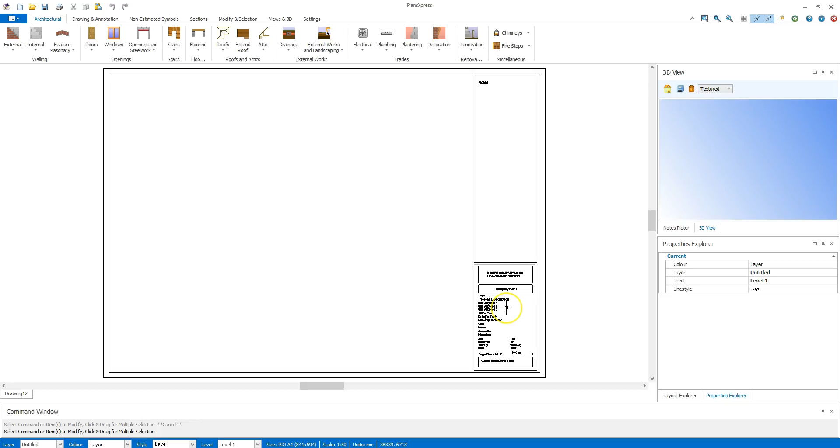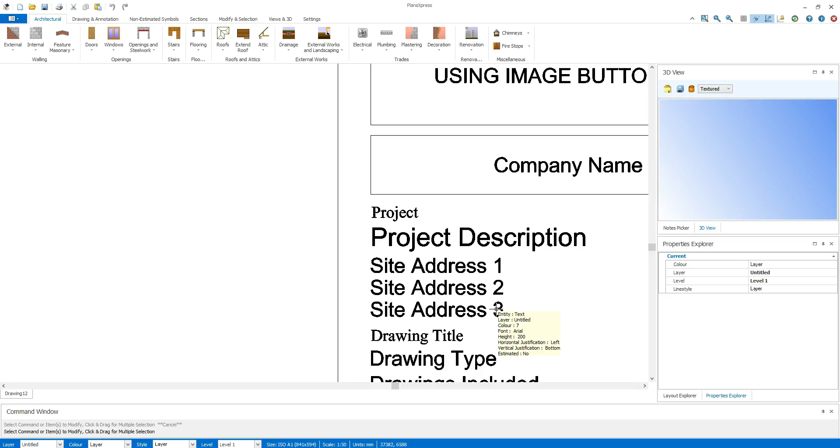To see this in action, move your mouse or cursor onto the drawing title block at the right of the screen. Scroll the wheel in and out, and you will see the software zoom in and out, around the original cursor position. Zoom out, move the cursor position and zoom in again, and you will then see that PlansXpress is zoomed in on that new position.

We're now going to look at moving the drawing sheet around the screen. Hold the middle scroll wheel down and keep it pressed down. Notice a hand icon has appeared on screen. Keeping the middle mouse pressed down, move the sheet around to place the title block in the middle of the screen. Zoom in and out if you wish.

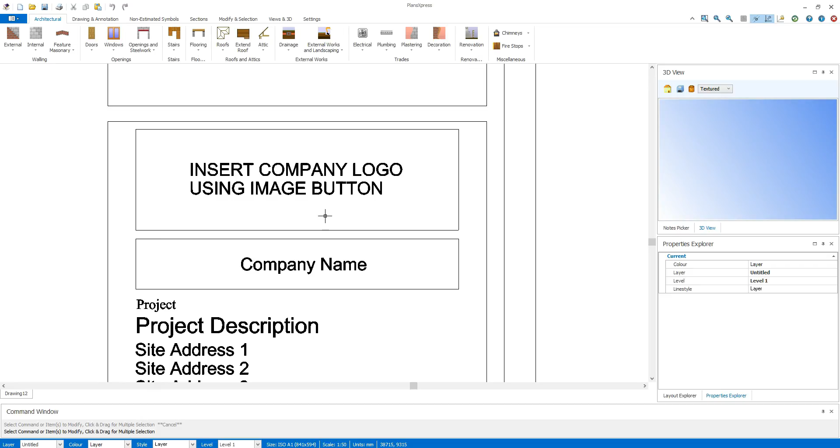This process of scrolling and dragging the page around is an important one to master. Spend a few seconds practicing doing this so that you can easily move the page around, locate and zoom in on points of interest on the drawing.

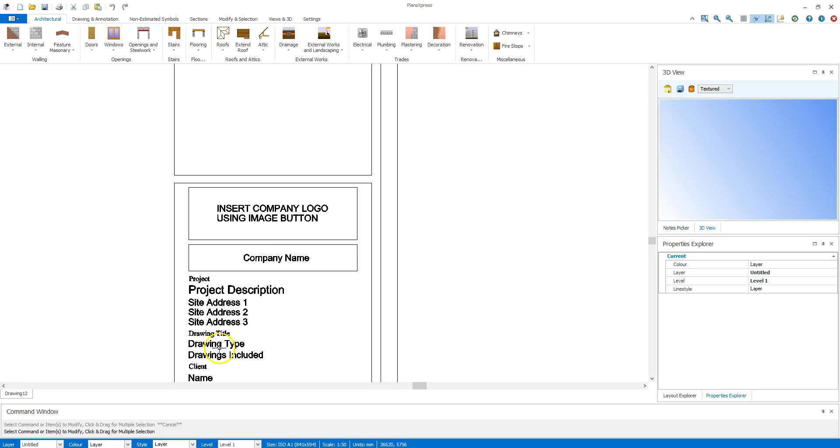Next, let's take a look at construction lines. These work in exactly the same way as drawing a faint pencil line on the drawing to help set things out. These are located on the Drawing and Annotation ribbon.

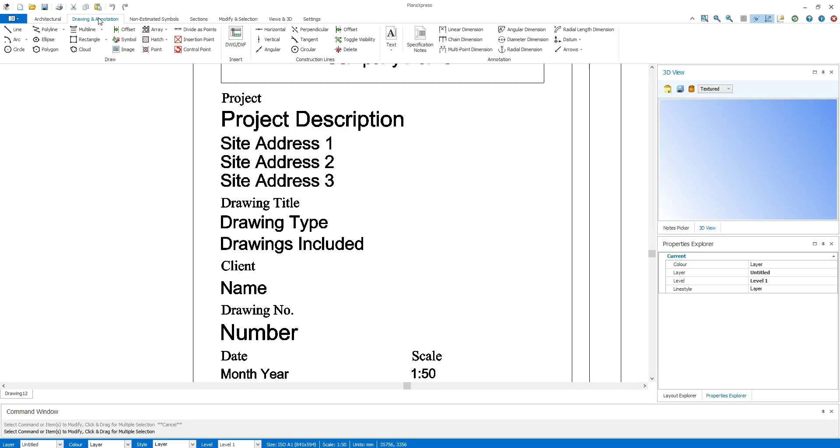First, click on the horizontal construction line and place towards the top of the page. You may need to zoom out before you do this. Next, click the left-hand mouse button to place the line.

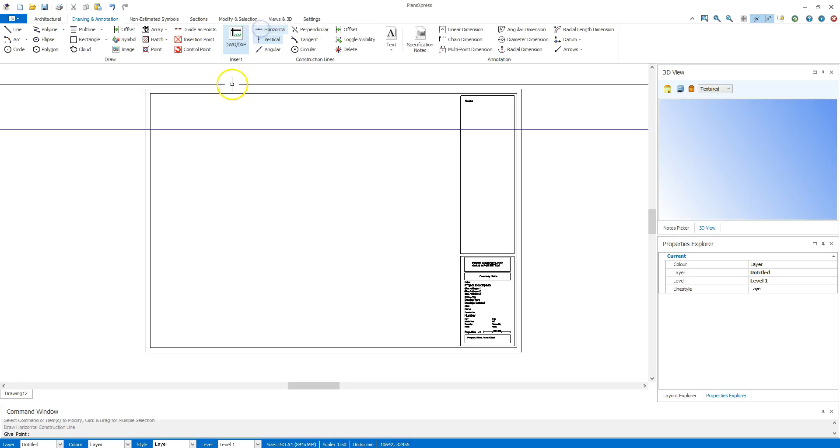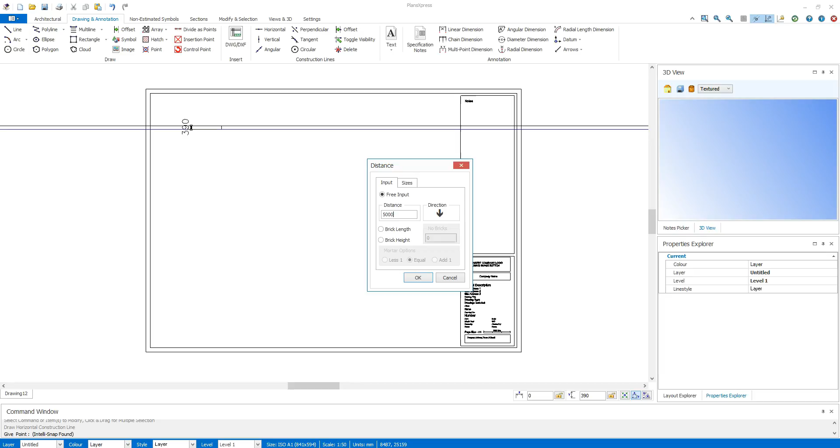We are now going to set out another line relative to the first horizontal line. Select another line. Hold your mouse over the construction line. Do not click, but instead press R on your keyboard. This tells the software that you want to set out something relative to another point, rather than snapping onto it. Next, press the down arrow on your keyboard and enter 5000. Hit OK, and another horizontal construction line appears 5000 millimeters away from the first line.

Let's now repeat this process for a vertical construction line. Select a vertical construction line from the menu and place on the left-hand side of the drawing. Click OK with the left-hand mouse.

Once again, hold the mouse over the intersection of the two lines or anywhere on the vertical construction line. Press R on your keyboard. Again, this is because you wish to set out a line relative to the first line, R standing for relative. This time, hit the right-hand arrow on your keyboard and enter 6000. Hit OK, and another line appears, this time 6000 millimeters away from the first. You can use the construction lines to set out anything on a drawing, such as the overall footprint of a house.

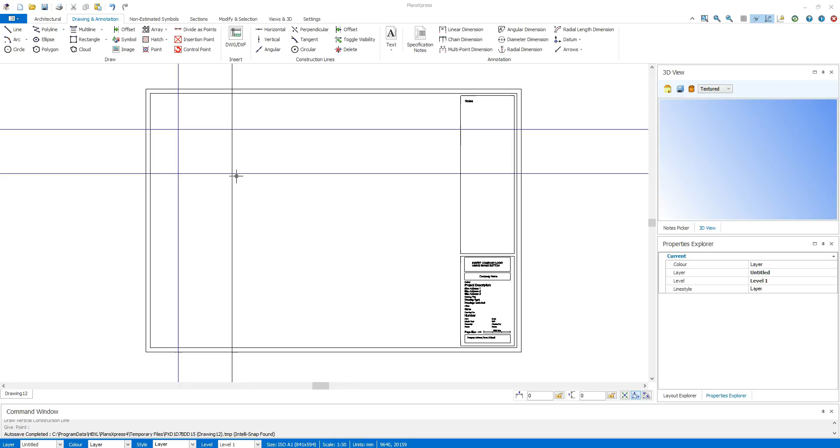Let's now have a look at the escape key. Some commands, such as construction lines, doors and windows, will continually be available to draw unless we press the escape key on the keyboard. This key usually appears on the top left-hand side of your keyboard and is marked ESC. To stop the current command, press Escape, and the software is then available to select objects rather than to draw another construction line, door or window, etc.

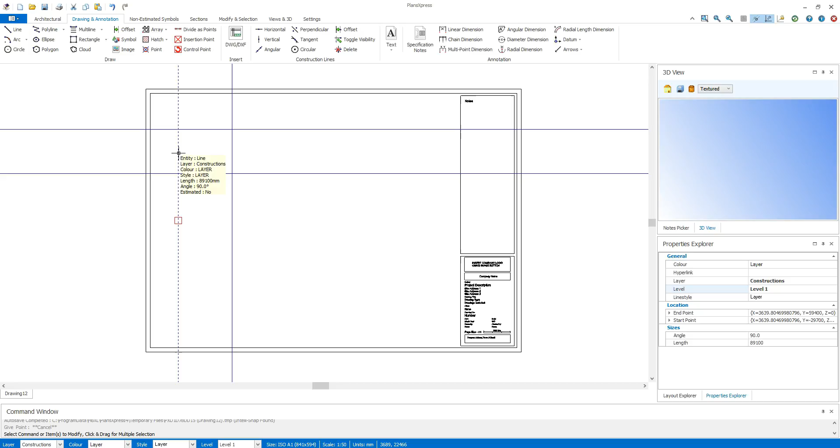You'll notice now that because I have pressed Escape, I can now select, for example, the construction lines. You can also drop the current command by selecting another object, such as a manhole, a roof, or a wall, etc. Let's now have a look at the undo and redo commands.

If you ever make a mistake using the software, or you want to undo something you have done, locate the undo command at the top left of the screen and press undo. This will remove that mistake. Conversely, if you press the redo button, this will cause the mistake to reappear.

Try pressing undo a couple of times and you will see the construction lines disappear. Repeat undo 2 more times and all the lines will be removed. Now click on the redo button 4 times and all the lines will reappear.

Remember, you can always use the undo command whenever you make a mistake or when you get stuck while using the software. You can use the undo and redo command to undo anything, such as undo a delete. You can also use the standard Windows commands Ctrl-Z to undo or Ctrl-Y to redo.

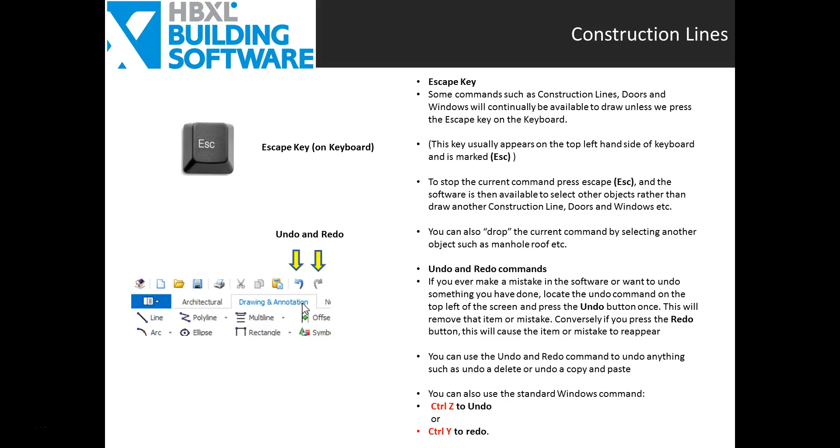We will now have a look at selecting items from the architectural ribbon or toolbar. Click on the architectural ribbon.

Look closely at the buttons. Underneath each button is a small down arrow which gives you access to the underlying selections. On the left-hand button, click on the down arrow.

Notice that the button currently displays a symbol denoting brick and block work. Select the stone cavity block wall.

Choose a particular wall height, say a single story. Left click with your mouse.

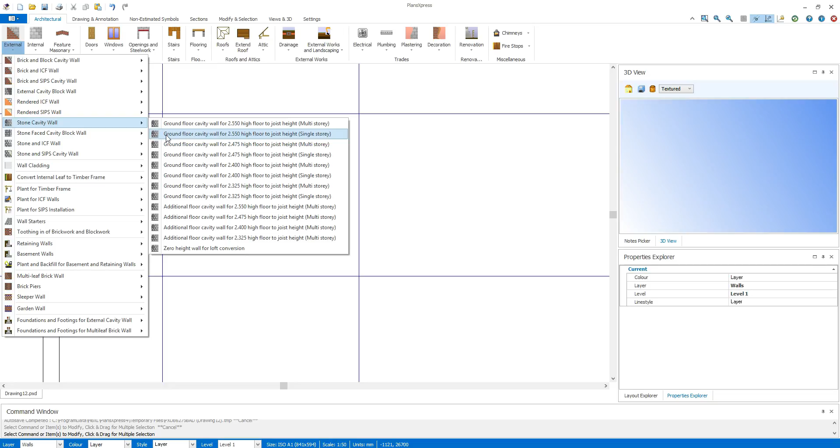Once the resulting dialog box has loaded, you will notice that the button has changed its appearance to show the stone cavity block wall. This means that in the future, if you now click on the button, it will allow you to draw a stone cavity block wall.

You do not have to drill down into the menu in the future to select that wall type. Simply click on the button. The button has, in effect, remembered the specification of the last wall you drew.

Next, work through the resulting dialog and note that the software is asking for details that define the dimensions and specification for the walls. Note that the cells entered in yellow will affect the appearance of the drawing, for example the wall height. Values entered into the white cells are being collected for estimating purposes when used in conjunction with EstimatorXpress and do not affect the appearance of the drawing.

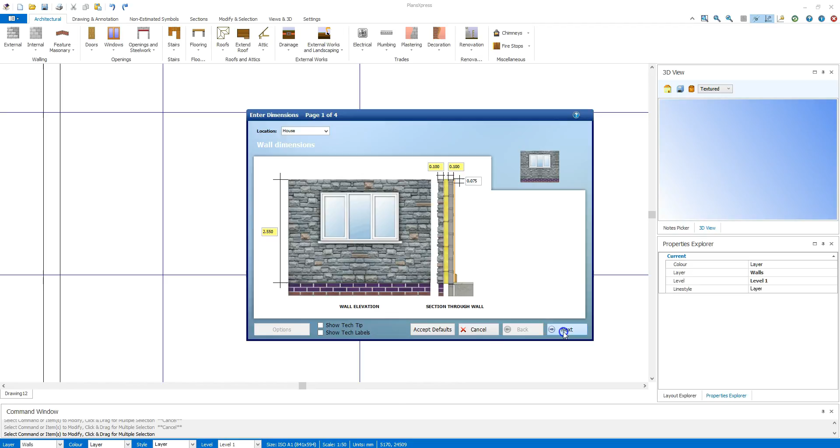Click Finish when you have reviewed all the dialogues.

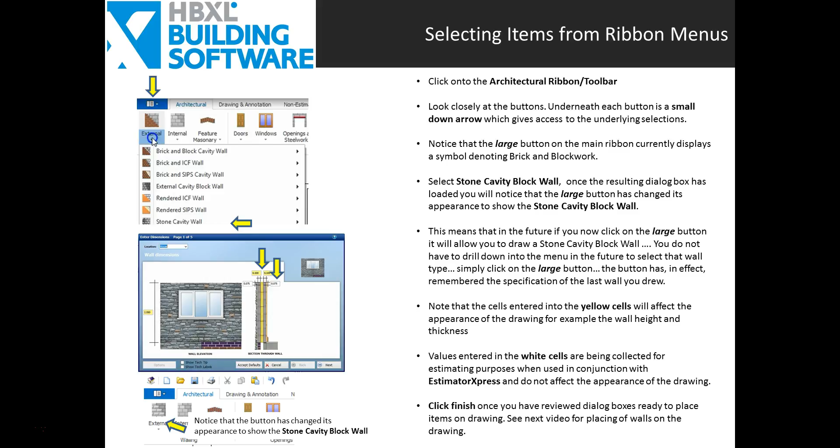You can now enter the wall onto the drawing. Place your mouse over the first intersection point and left click. Raise your finger off the mouse, place it on the second point and left click again. Repeat the process for the third and fourth intersection.

After the fourth click, press C on your keyboard to close the loop. The C command can always be used to close any item, and it will always close the loop via the shortest direction.

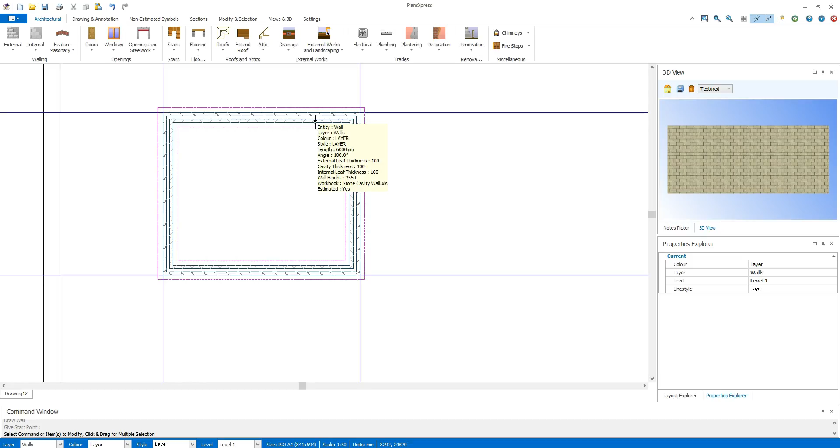Now use the undo command to remove all the walls. Next, add the walls back by selecting the stone cavity wall button and adding back 2 walls to the left and bottom of the rectangle.

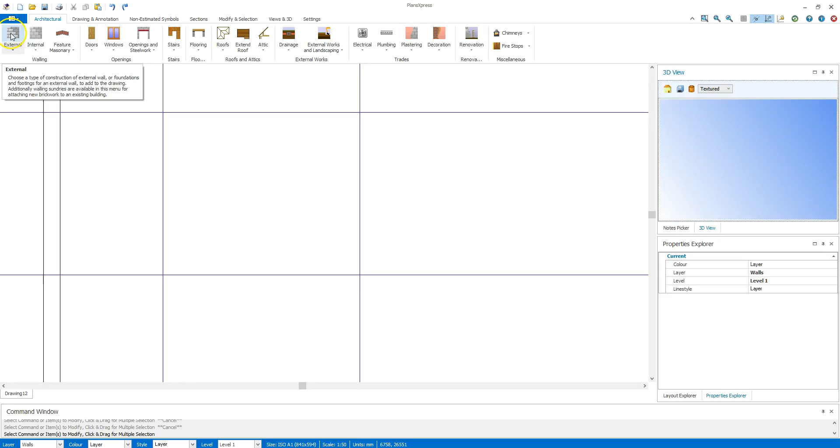Now press S on the keyboard, and this again closes the loop, but does so by keeping the walls at right angles, i.e. it does not take the shortest distance between the start and the current position and maintains a rectangular shaped building. The S key only works for walls.

Let's now have a look at justification. First click on a wall that you have just drawn. You will see that the wall appears dotted, indicating that the wall has been selected.

If you look at the top left-hand side of the screen, you will notice that the wall is justified to the right or left of the line, depending on how you drew the wall and the justification mode that the system was last used in.

If you select Justify Center, the wall is justified to the center of the line. If you do it to the left, it is justified to the left.

Bear in mind that you will not always have a construction line there, and the wall may be changing its position relative to an imaginary line. Let's place that back in right-hand justification.

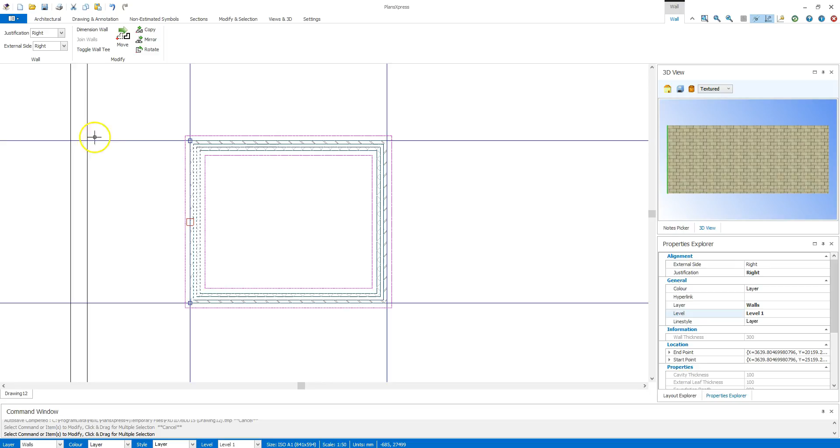If I select all the walls by clicking to the top left-hand corner, holding my mouse down and dragging over, you will then see that all the walls have been selected. I can then click on those to justify those to the left. You will now see that all of those have been justified to the left of the lines.

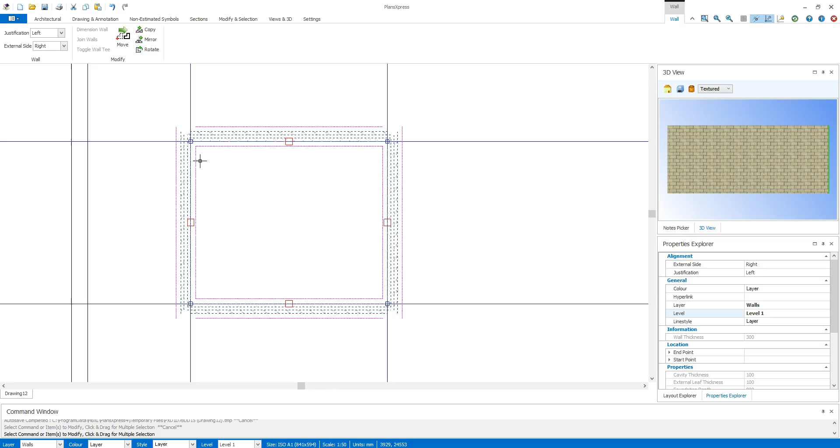The justification of the wall can often be confusing, as it depends on the way that the wall has actually been drawn. The important thing is to check that visually it appears okay and switch the justification if required.

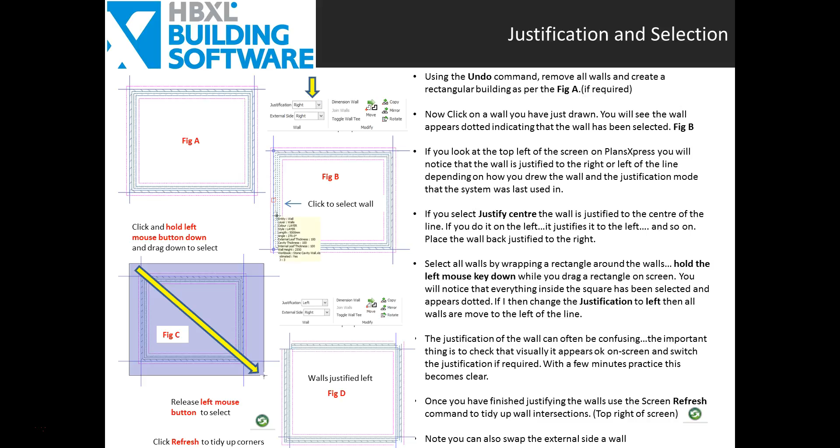Let's start by showing you the basic commands of how to draw walls. Click on the architectural ribbon, choose the external walls, brick and block cavity wall. On this occasion I'm going to pick a 2.4 high single story wall.

A dialog pops up. For those of you who already have EstimatorXpress, you'll recognize these. For the time being, I'm just going to accept the defaults.

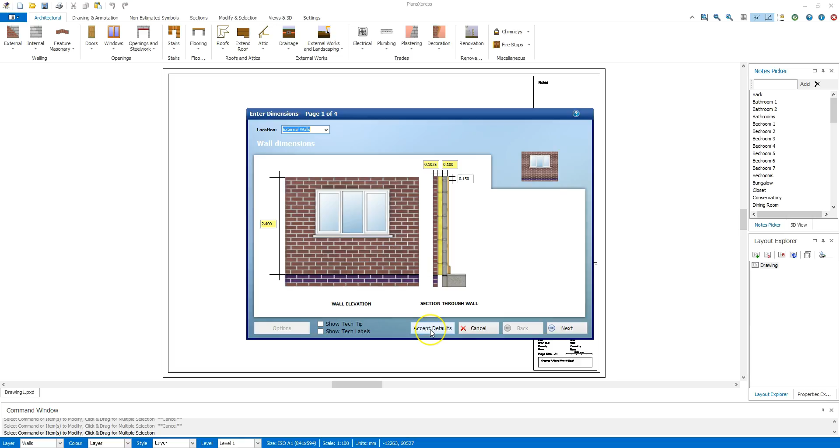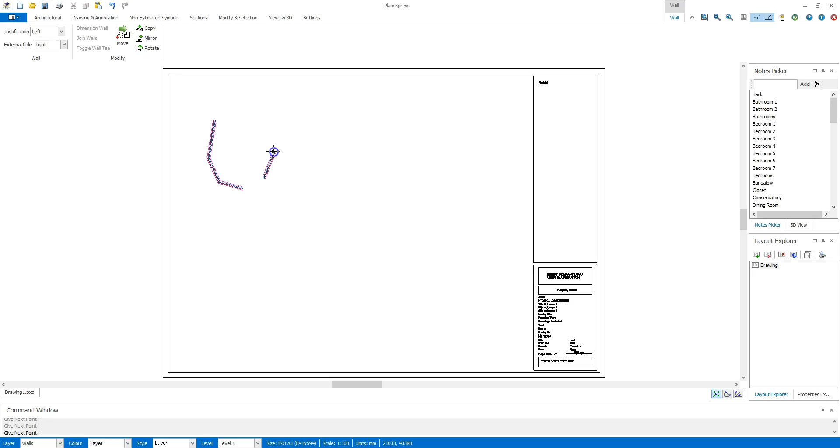I can then place the walls anywhere on the drawing. I click with my left mouse, take my finger off the mouse, move to a next position, and repeat the process, clicking, lifting my finger off as I go around. When I finish drawing my walls, I press Escape.

Now I've got my walls. I'm going to zoom in on those by placing my mouse in the middle of that particular group of walls and scrolling my mouse wheel out. Reversing the process goes the other way.

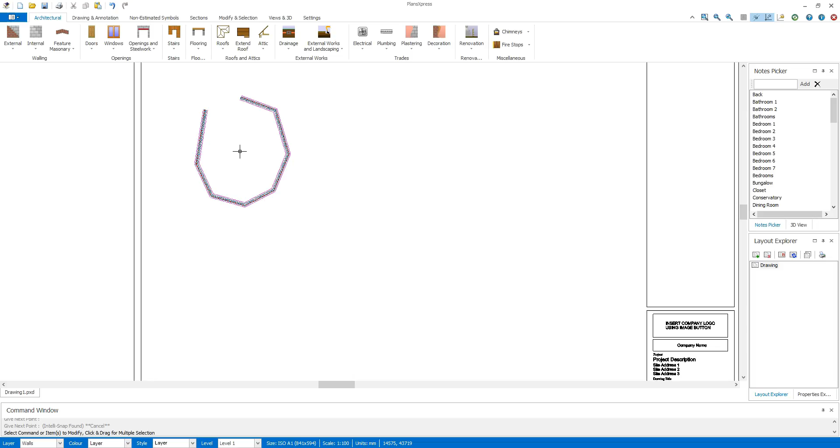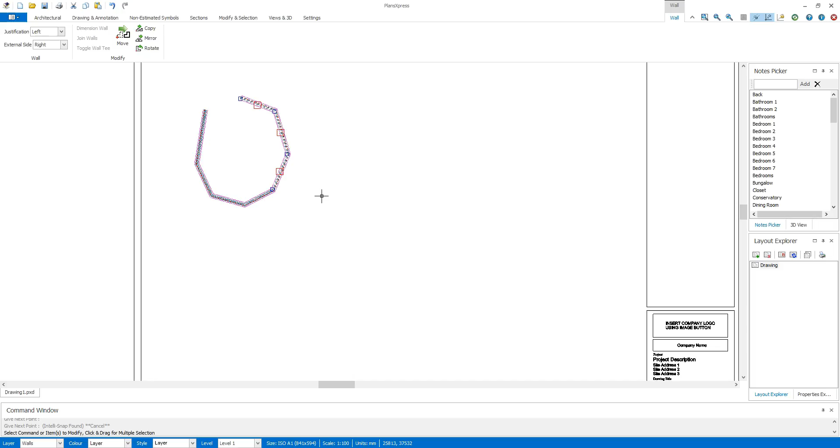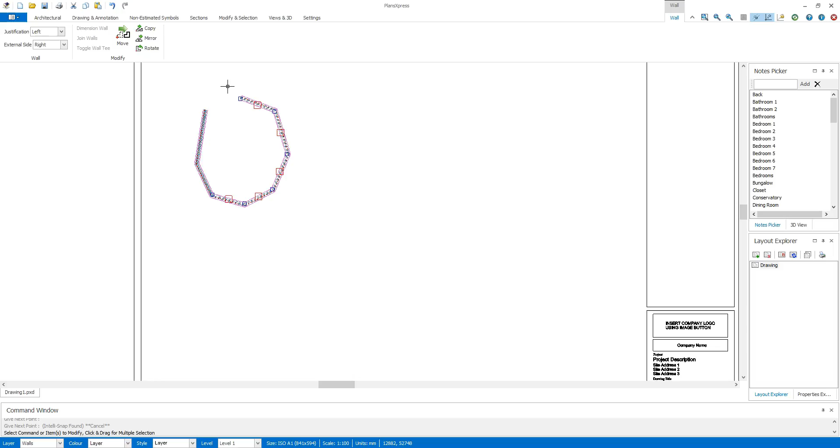I can select each individual wall by clicking on it, or I can draw from top left to bottom right to select a group of walls. You'll notice that only the walls I've embraced with the rectangle have been selected. Alternatively, if I go from bottom right to top left, you'll now notice that all the walls that touch the rectangle have been selected, as opposed to all the walls that were completely embraced by the rectangle. Once I've selected a group of objects, I can now copy them, rotate them, or in this case, delete them.

Let's see that again. Select the walls, click, the walls appear selected, and you can then delete them using your keyboard.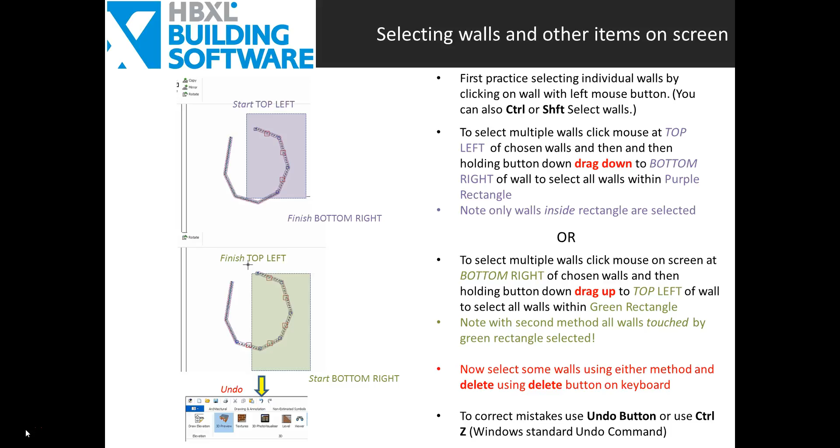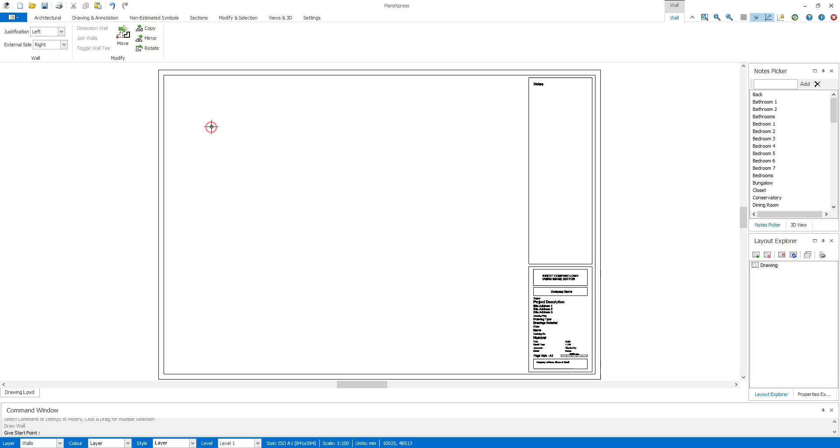I'm now going to draw some more walls, but this time I'm going to constrain them to be at right angles, since most houses are constructed with walls at right angles. I click on the wall. This time it's remembered the previous wall I've selected. Again, I can zoom in and out. I can also press the middle mouse button to drag the drawing around to get it in exactly the position I want. I can then click, and this time I'm going to press the Shift key on my keyboard.

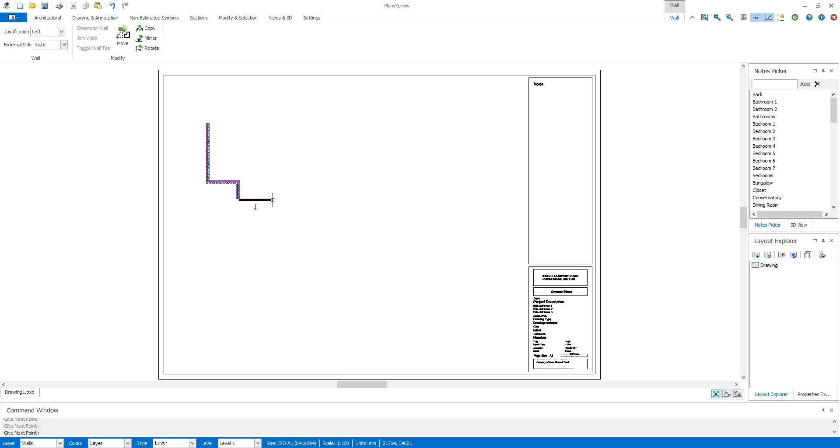You'll notice that the wall is at perfect right angles. If I keep the Shift key pressed down and move my mouse across, you can see that everything is kept perfectly at right angles. If I now press S on my keyboard, the software automatically assumes that I want to go back to my starting point, and I then have a nice rectangular house. I can zoom in on those again using my scroll wheel and out the other way.

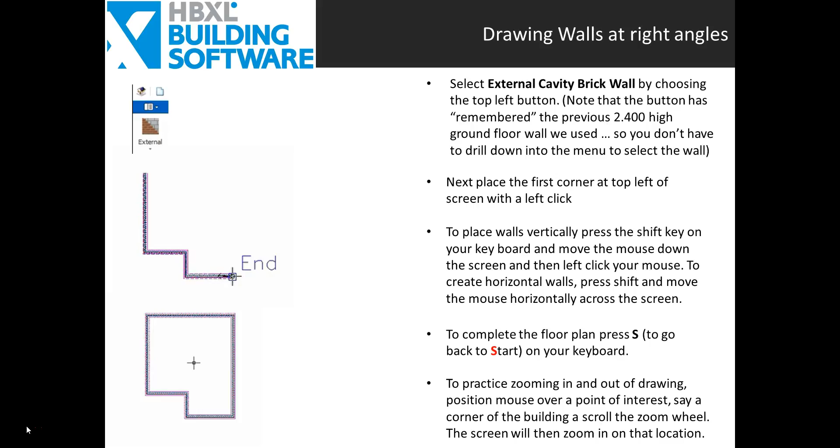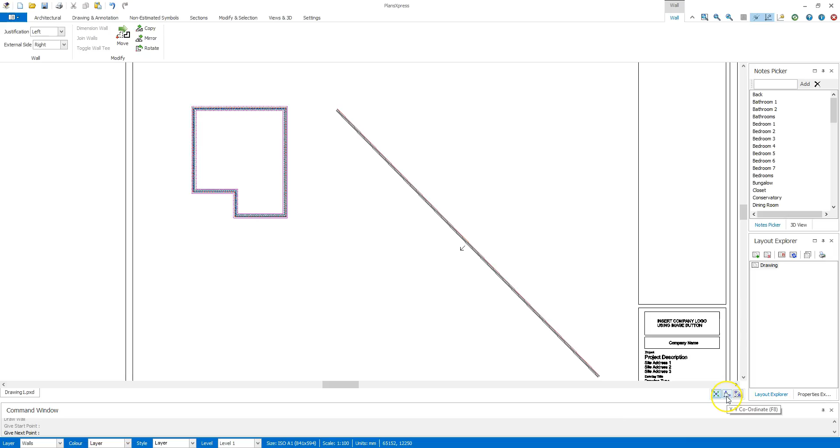If I want to lay out my house using dimensions, I can select my walls again, click on the drawing, and you may have noticed down at the bottom right hand corner the X and Y coordinates have appeared. If I click on those and move my mouse, you'll now see the dimensions have appeared. I could also have gone into dimension mode by pressing F8 on my keyboard.

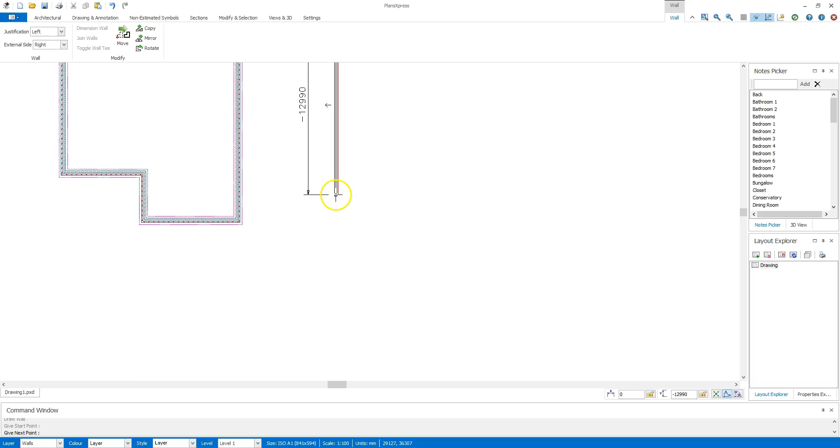Again, I'm going to hold my Shift command to keep everything at right angle. I can zoom in and position it exactly on the dimension that I want. Keeping my finger on the Shift key, I can see the precise dimensions that I've got. Again, I'm going to press S to close.

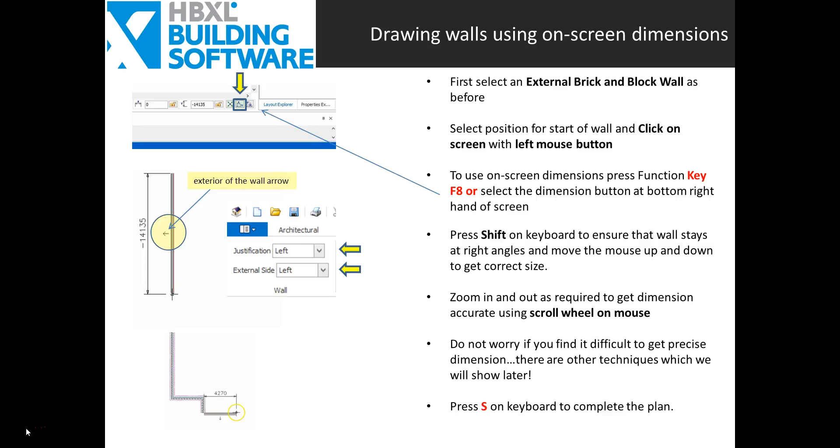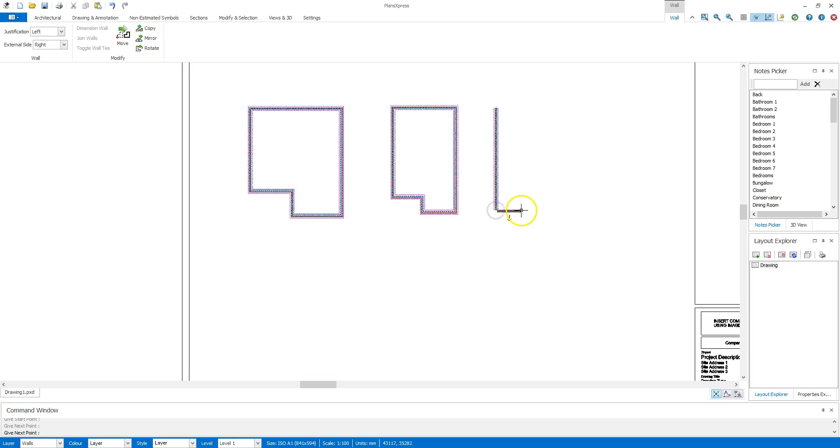I can leave the dimension mode and return to snap mode by pressing F7 on the keyboard. Snap mode allows me to snap on ends and middles of walls, etc. If I then repeat the process, press F7, the dimensions have disappeared. Press F8 and they reappear.

If I press F7 again to go into snap mode and place my mouse over the starting point, you'll see that an end point has appeared and a dotted line. If I move it carefully over to the right and press the Shift key, the two points have lined up exactly. I can then press S or C on my keyboard to close it, and once again the loop is closed.

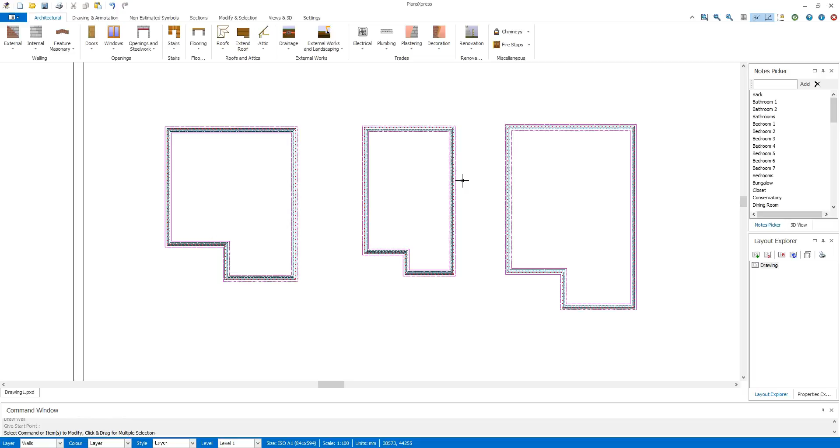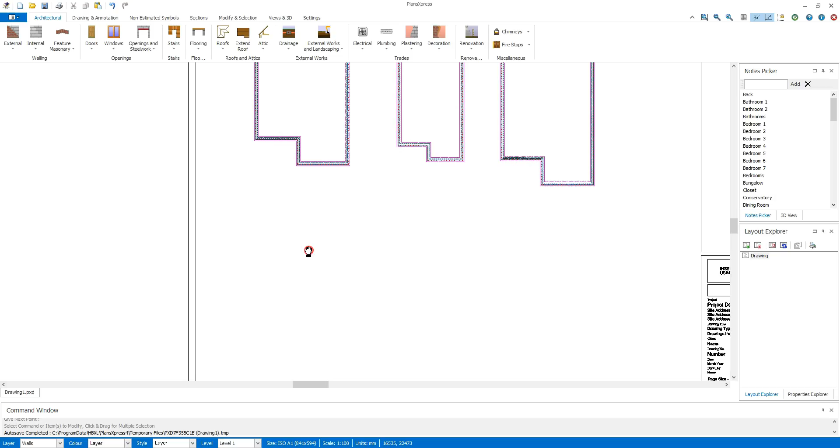I'm now going to show you how you can set out a building even more quickly. First, I reposition the drawing to make space for the new foundation. Holding the middle mouse key down, I can move the drawing around, zoom in and out to create the required space.

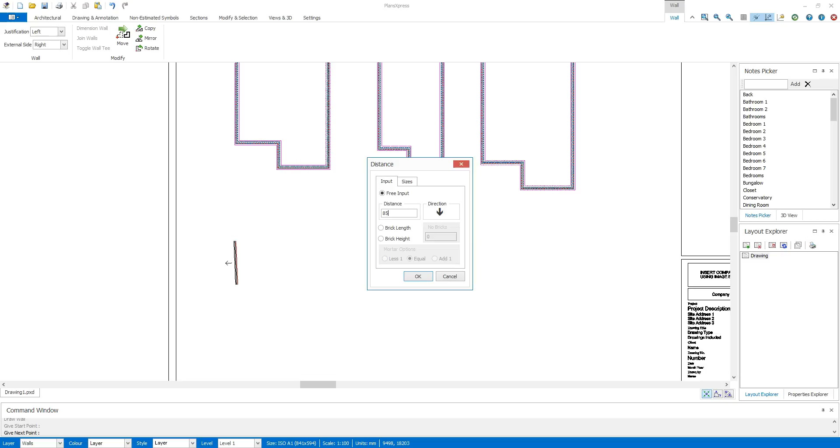Click on the wall button and place the wall on the drawing. This time though, I'm going to press the down arrow on my keyboard. A dialog appears into which I can enter the dimensions of the wall. This time the wall is 8,500 millimeters long. You'll notice that it's done the internal dimension of the wall at this stage.

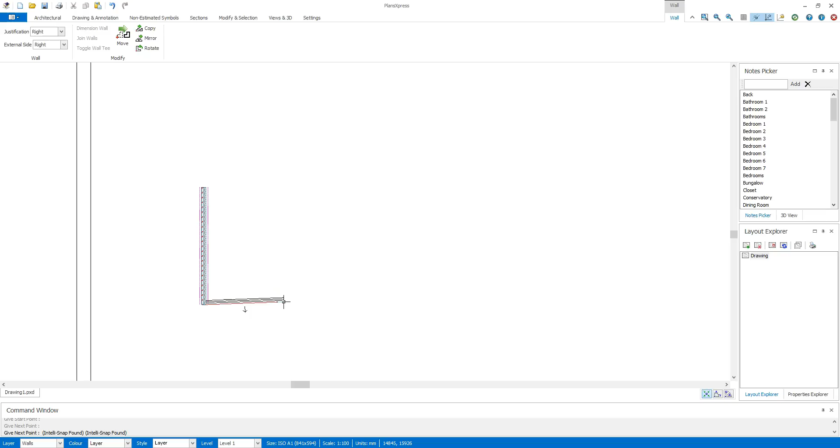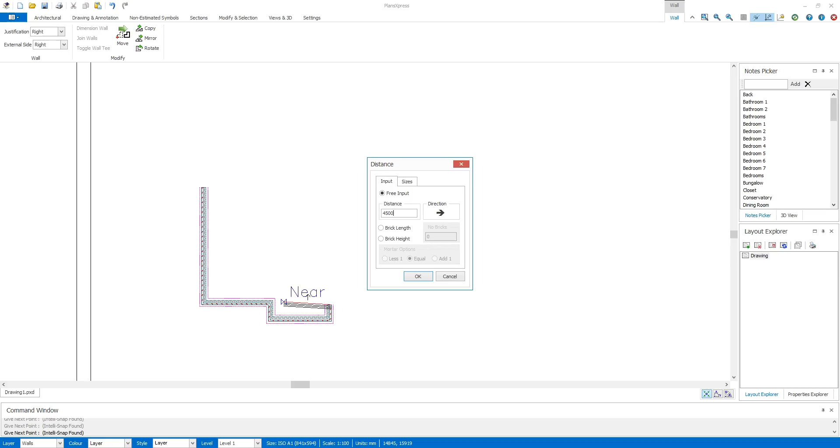If I want it to do the external dimension, I need to change the justification. I then hit the right arrow on my keyboard and enter the length of the wall. I then press the down arrow to put a front projection, enter 1200 millimeters, another 4500 millimeters to the right, press my up key, enter 1200 millimeters, and finally enter 4500 to the right. I can then use my S command to complete the building.

Zoom out, see the whole drawing, and move it over.

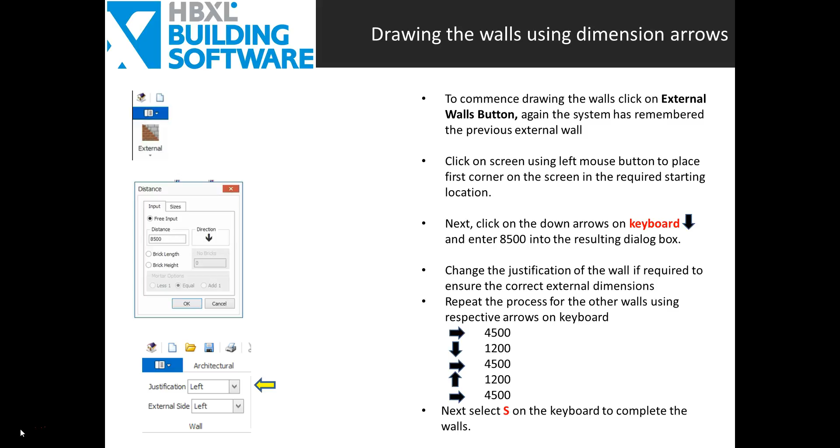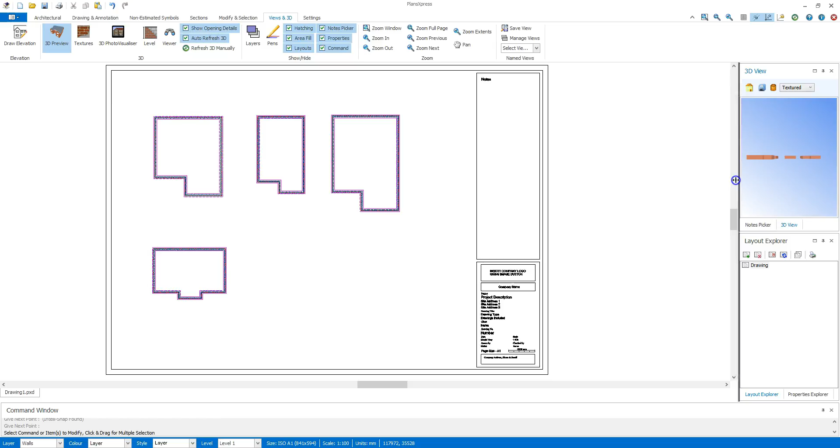Let's have a look at the 3D images of the houses we've drawn so far. Click on the 3D preview button and the 3D window appears on the right hand side of the drawing. I can resize that drawing by placing my mouse over the edge of the frame, holding the mouse key down and dragging it across. The same on the other axis.

I can then zoom in using my middle mouse, hold the button down, and I can explore the images that I've created. I can change the appearance by clicking on the different buttons. There's the shaded view, the wireframe, and the transparent view.